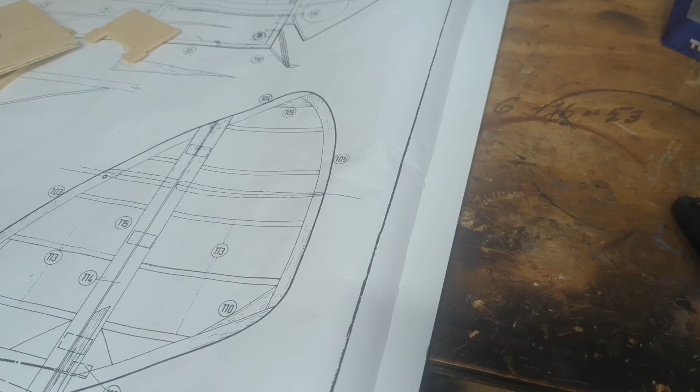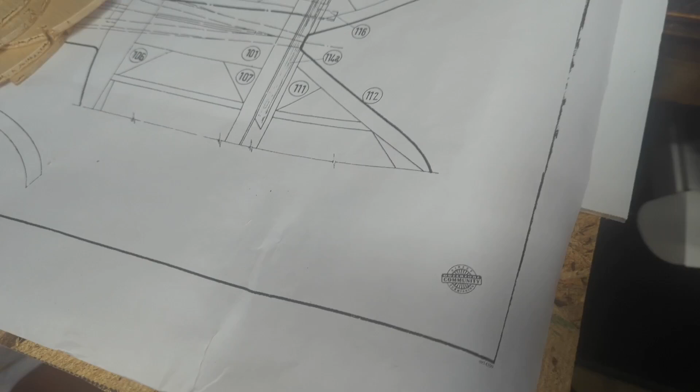Okay, first thing I want to talk about is I had to do a little bit of a modification here to my workbench. At least from this section here, you can kind of see that, of course, there's the wall, and then here is the very end of the workbench itself. And you can see the plans there extend well past that.

So I went ahead and bought me some plywood, cut it to size the best I could, and have that kind of laid on my workbench here to sort of work on this. There is a little bit of an overhang on this plywood piece here, so I figure we'll see how it performs. I may put an extra additional brace or something to kind of keep it up there, so we'll just see how it goes.

So yes, anyways, this is what we got going on here with the Tiger Moth. You can of course see the plans there in the background, starting with the fuselage section first. Don't mind the mess there. So yeah, starting with the fuselage first, and then we'll kind of proceed after that point.

So what I've been doing here, I've been keeping most all the long pieces, balsa sticks, balsa triangles, all that stuff in the box for right now. And I've been kind of going through the box and trying to separate things and trying to put like things together or similar numbered things together.

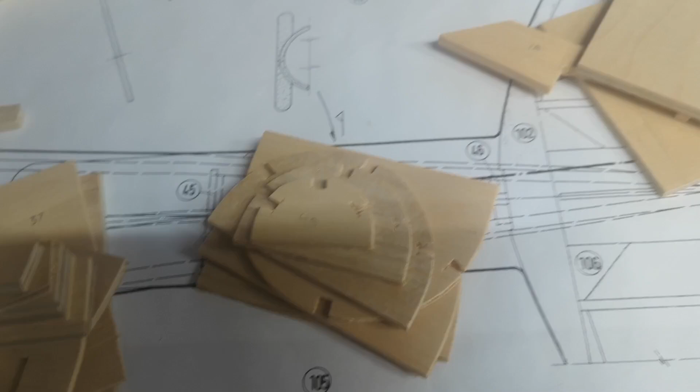So just to kind of give you an idea, this is the 170 set of pieces. This is the 160s, I've only found one of those so far. 150. Going down here, here's some of the 20s. Here is the 30s and the 40s, which looks like a lot of formers and stuff, and so on. So just trying to group like numbers together.

Thought I would do it in groups of 10: 1 through 10, 11 through 19, and so on. Just trying to group like things together by number. So that's kind of where I'm at with that, and like I said, just kind of keeping all the bigger pieces in the box itself for right now.

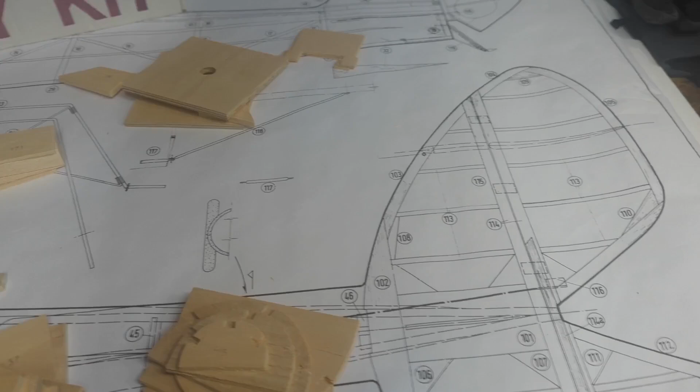A couple other challenges that I'm seeing right now with doing the Tiger Moth build. This probably isn't a huge thing, but it is something I've noticed with this particular airplane, which I have not encountered yet. And that is, well, you see a problem here.

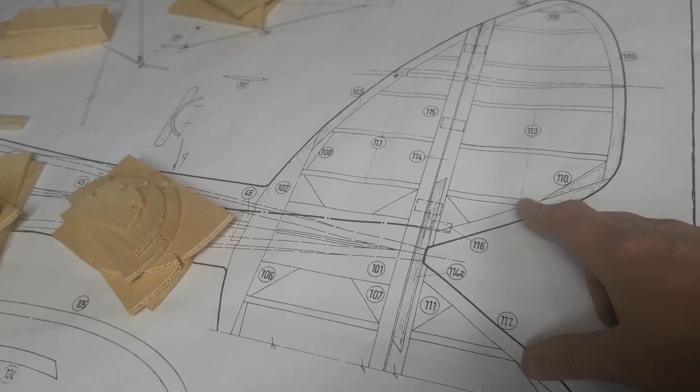So just an FYI, when I did the Cloud Ranger, something such as the elevator horizontal stabilizer was all printed together on one sheet. And you can see here, you're getting like basically two-thirds of it, and then it cuts it off. Or if I go over here to the plans, you know, that's how it is on there as well. If I scroll down, there is no continuation of that.

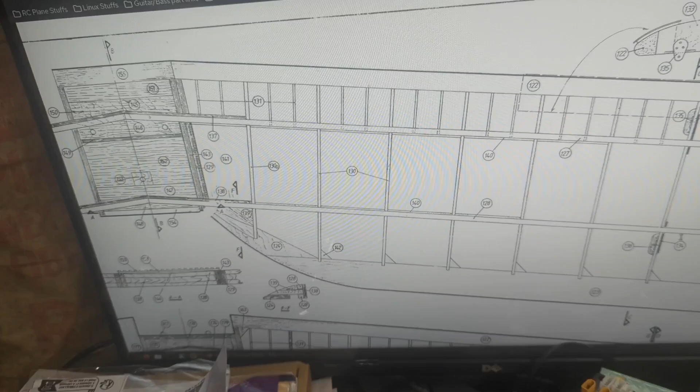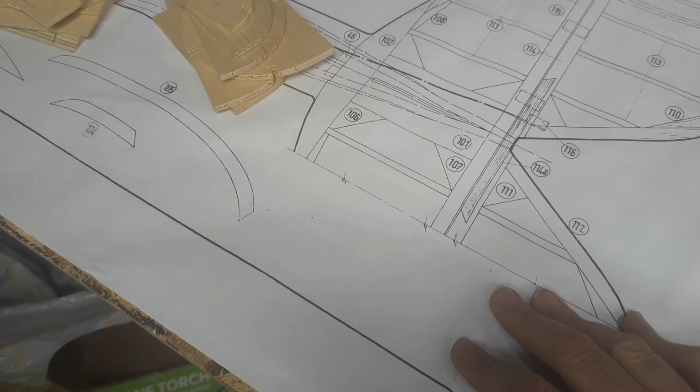And actually this is a good example too, because if you look, here's the wing part of the plans, and if I scroll down, again it's about half or two-thirds of the actual thing itself. Rather than getting a whole sheet of just the elevator that I can work with, I basically just have a two-thirds or half section to work on, and I have to mirror that on the other side.

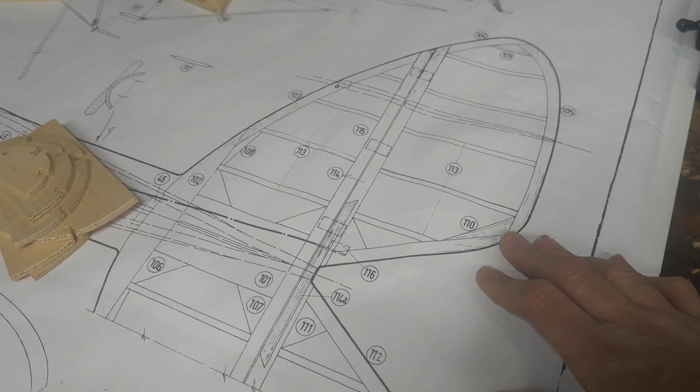I think I had seen where some plans are like that, and that's kind of a new thing for me, especially with this being one of my next builds. So I think in that case I'm probably just going to have to figure out a way of doing a copy, like an inverse of this, or flipping the image around so I get the duplicate, so I have something to work off of. So there's that one little challenge.

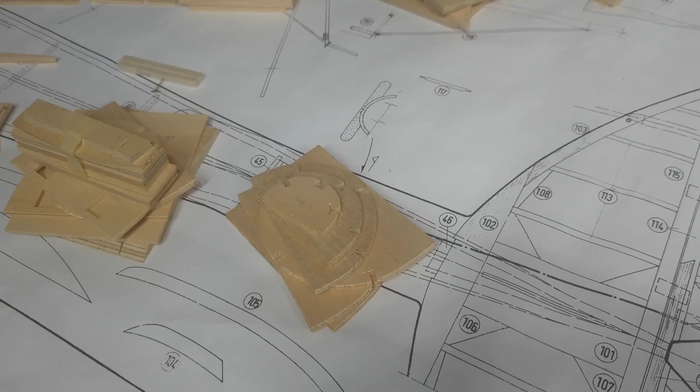Let me show you another challenge as well that I have noticed. So what I got here is, of course, the other side of the box with the remaining pieces here that I'm still kind of going through. What I'm noticing is some of this stuff.

Broken off pieces. A couple little shards of balsa wood and things like that. So that makes me wonder what here is broken at this point, what pieces actually got broke or whatever. There's a really nice one there. So it makes me kind of wonder, like I said, what pieces of this are broken.

Am I going to have to sort of fabricate some pieces because they got broken during years of transport and different environments and things like that? Because I don't know the history of this kit, aside from the fact that it came from Bob. So that itself presents a challenge.

And these, honestly, they may be nothing. I mean, they may just be a broken piece off one of those sheets that has like the wing ribs or something, and maybe it's just an irrelevant piece at this point. I don't really know, so I really won't know that until I start diving more into it.

So that's where we're kind of at with the Tiger Moth. Like I said, just going to take my time and sort of go through things. Let me put this to the side here. So yeah, that's kind of where things are at with this.